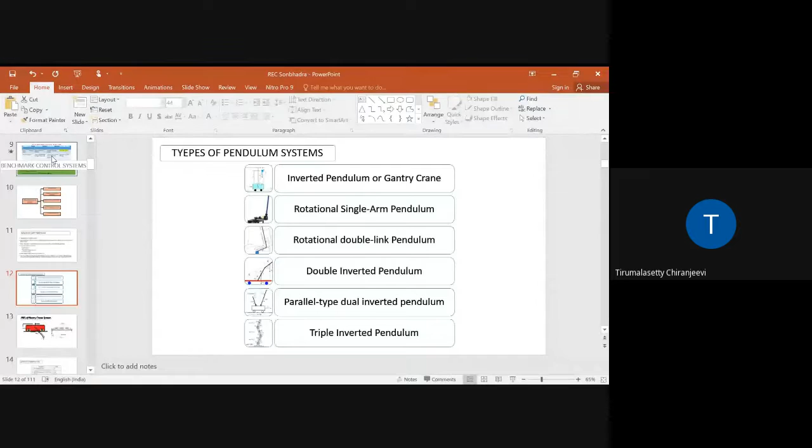Sorry for interrupting, sir, the slides are not moving. Yes sir, now moving, sir. Is it visible? Yes sir, visible, sir. Actually I am going on presenting mode. Can I go in presenting mode? Yes sir, presenting mode, sir, that's good.

There are 4 varieties of benchmark control systems. We segregated these 12 systems into different categories: process control category, servo control category, aero control category, and mechanical system control category. If you are designing a controller, you have to test it on these systems.

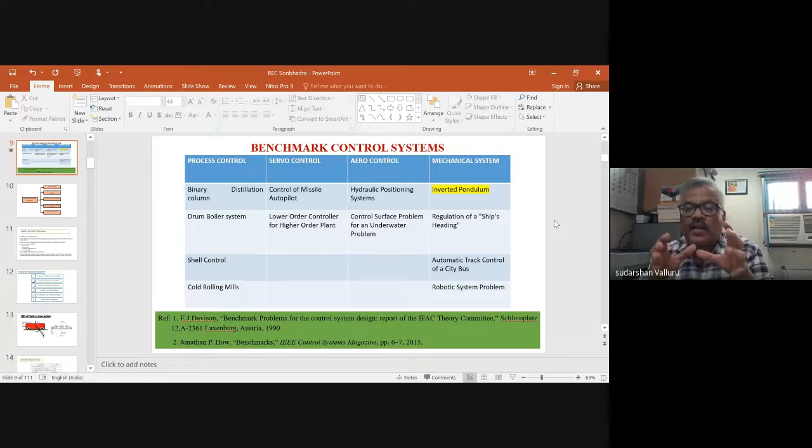Your controller is working, validated, and tested only on these systems, then its performance is considered good. Otherwise, we can't test a controller on simple transfer functions like 1 by s square plus 1, or s square minus 2s plus 1, or 1 by s square plus 2s plus 1. You have to test a controller on a dynamical system. These all come under dynamical systems.

For example, in process control, there is a binary distillation column, a drum boiler system. The mathematical modeling and equations for these are available in the Davison report, benchmark problems for control system design. I am not showing all these details here.

When you go for shell control, cold rolling mill, these all come under process control with higher order degree systems. The differential equations are of higher order degree containing non-linearities. Next, we come to the servo control head.

They have taken 2 systems: control of missile or autopilot mode of an aeroplane. The missile, after some time, will go on autopilot mode. When you are going to fire the missile, after that it will go on autopilot mode without requiring the pilot. At the time of firing, only the pilot is required. And you are traveling on the aeroplane.

You know very well, the role of the pilot, the role of human intervention, is when the pilot is landing the aeroplane, or when the aeroplane is taking off. At these 2 instants only, takeoff and landing, human intervention is required. Remaining things, there is no need of human intervention.

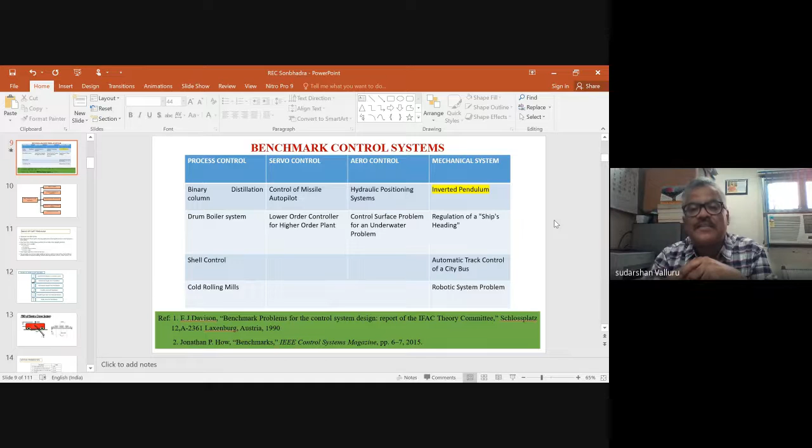The third category, aero control. Aero control includes hydraulic positioning system, control surface problem, and an underwater vehicle problem. This is what they classify as aero control.

Coming to mechanical systems: cart pendulum system is one category they design, and regulation of ship heading also comes under mechanical system control. Another one is automatic track control of the city bus. That system is also modern - intelligent transportation system, we are using track control of the city bus system in transportation. Now they are using automatic track control of city buses.

Robotic system problem. Robotic - you know very well - human robots are underactuated robots, only a single controller is there. Take for example our robotic arm - what is the degree of freedom of the robotic arm? 1, 2, 3, 4, 5, sometimes you see 1, 2, 3, 4, 5, 6. The maximum available degree of freedom is 6, like the human hand - the robotic arm works like this, to pick and choose, pick and place objects. We are going to pick something, we are going to place something.

That means the robotic system problem, the robotic arm, is also considered a mechanical system. But here only one controller is there - not one motor here, one motor here, one motor here. There are no 6 motors here, only a single motor, single actuator, single controller is there. This system is what we call an underactuated system.

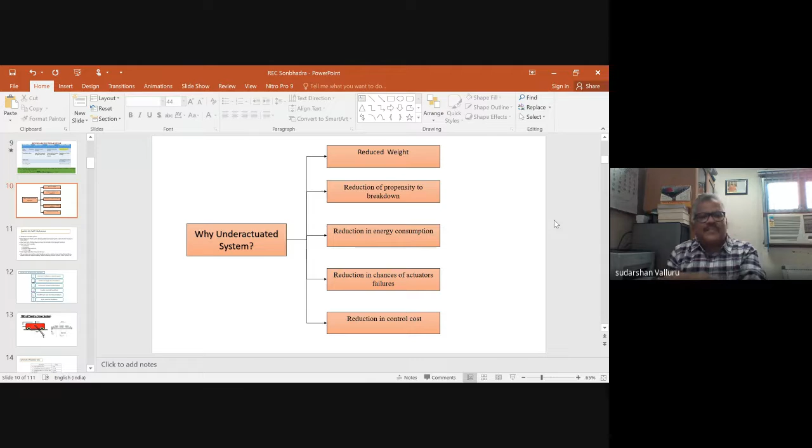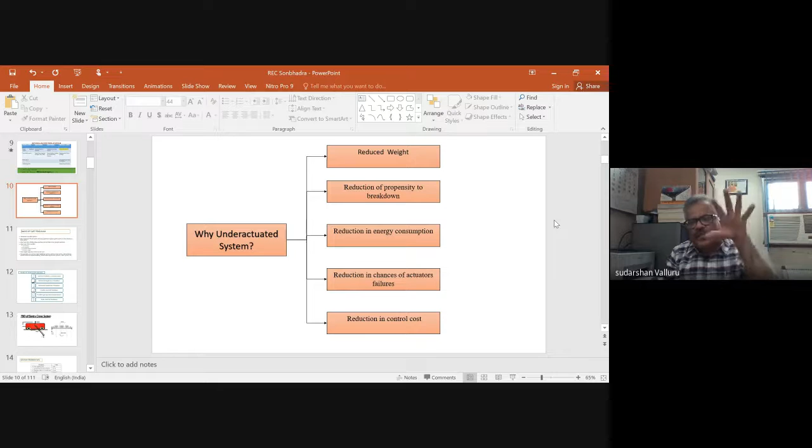Suppose if we are keeping 6 motors here for the robotic arm, 6 actuators for the movement. So suppose I am going to make a robotic arm now - 6 actuators are required, and for 6 actuators, 6 controllers are there. In these 6 controllers, there is a chance of actuator failure. If one actuator fails, it can't move further. And now, 6 controllers are required, so the cost of control is also very huge. That's why it's not possible - that's why we go for underactuated systems, because God has manufactured underactuated systems.

Underactuated - degree of freedom is lower, degree of freedom is lower. That's why, as I already told you, higher order plant with lower order control. The lower order control is lesser, but plant controlling capability is very higher. This is what we are going to say.

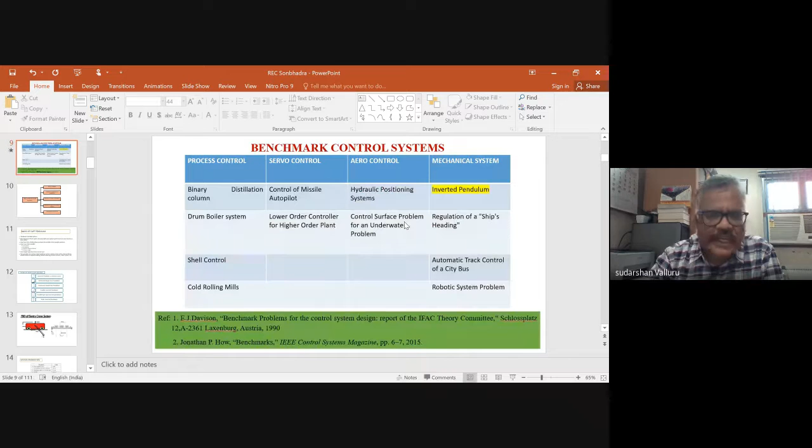Now in this regard, I am going to take my inverted pendulum as one of the systems we are going to test in our laboratories for different controllers we are going to design. Here I am going to take a cart pendulum system.

The cart pendulum system is an underactuated system. These are the basics of this cart pendulum system. It is a non-linear system, unstable system, and also a non-minimum phase system, because the system has right hand S-plane poles and zeros in close vicinity to each other. That's why we plot the poles and zeros. After plotting, we know it is a non-minimum phase system, meaning it has all right hand S-plane poles and zeros in close vicinity to each other.

Now the system has 2 states. One is a stable state, that is the down position, and the other is an unstable state, that is the up position. There is a cart, I will show you that. Two things are there: the down position is stable, but if the cart is moving, even the pendulum becomes unstable. There is no fixing part for the cart, and the pendulum is freely moving. Just a cart will be there, and we keep a pendulum on it. That means there are 2 states: the stable state and the unstable state.

Suppose, like we tried in our childhood, I don't know what you call it at home, we keep something vertical on our palm, some object, and try to walk with it. It automatically falls down from your palm. Have you observed this or not? Suppose you are keeping a broom, or what you call in Hindi - I think majority will know Hindi - jadu. If you keep jadu on your palm and try to walk, it will fall down. This is an unstable state, what I call an upright position. But if you just keep it touching like this, it is in a stable state.

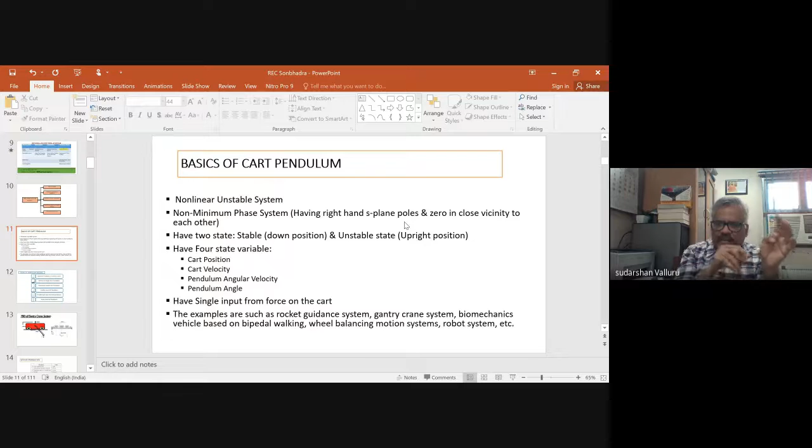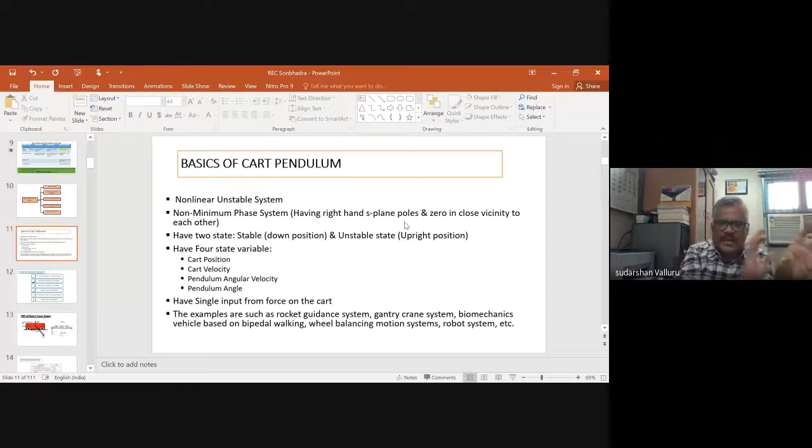That's why examples such as this basic cart pendulum system mimic the rocket guidance system, gantry crane system, and biomechanical vehicle systems based on bipedal walking. Nowadays, some bipedal two-wheel systems exist - we walk on biomechanic vehicles, bipedal walking, wheel balancing motion system robots. These robot walking systems also come under the category of the inverted pendulum system. That's why they are designed and standardized with a higher order degree, giving the 4 state variables in that report.

What I am going to say now is there are different varieties of pendulum systems available nowadays in the market. One is the inverted pendulum system.

Suppose the pendulum is up, this is upright position; pendulum is down, we call it a gantry crane. Types of pendulums: second one is a rotational single arm pendulum. Third one is a rotational double link pendulum, double inverted pendulum. A cart will be there, double and parallel type dual inverted pendulum, triple inverted pendulum, like that. Several varieties are available nowadays, standard systems.

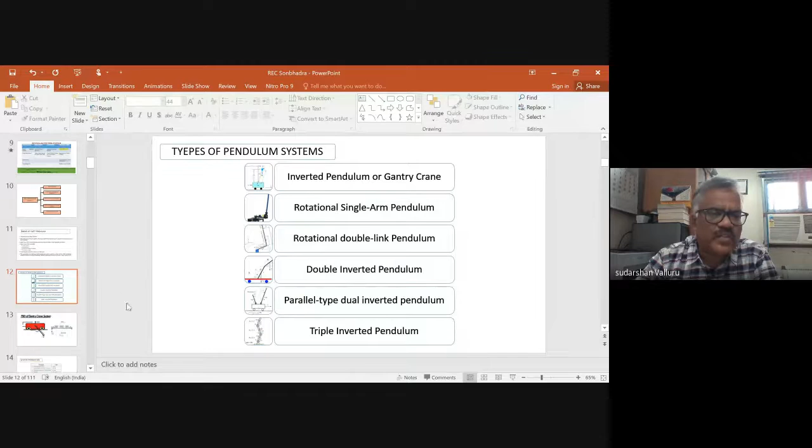Okay, you can see it. I don't want to go in that manner. What we are having, we will see from that only.

Ultimately, we are going to control the force supplied by this cart and pendulum from the DC servo motor. Ultimately, the DC servo motor I have to control by using a PID control. But the PID control has some problems.

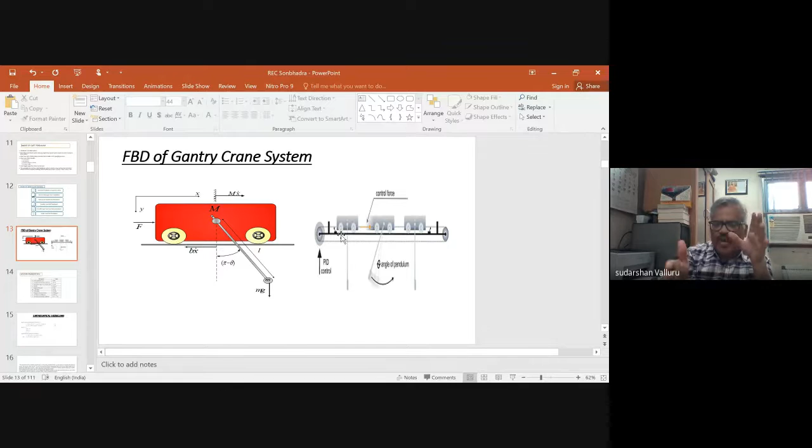Now, these are the system parameters. The force maximum available to the cart is plus or minus 24 newtons in that direction. The cart position from the reference, the middle one is the reference, is plus or minus 0.5 meter on each side, so the total length the cart will move is 1 meter. The pendulum angle with respect to the vertical axis is 0.1 radian, the gravitational force is 9.81 meter per second square, and the length of the pole is set at 0.38 meter. Here the flexibility is there to change the length of the pole, the mass of the pendulum, and the mass of the cart also.

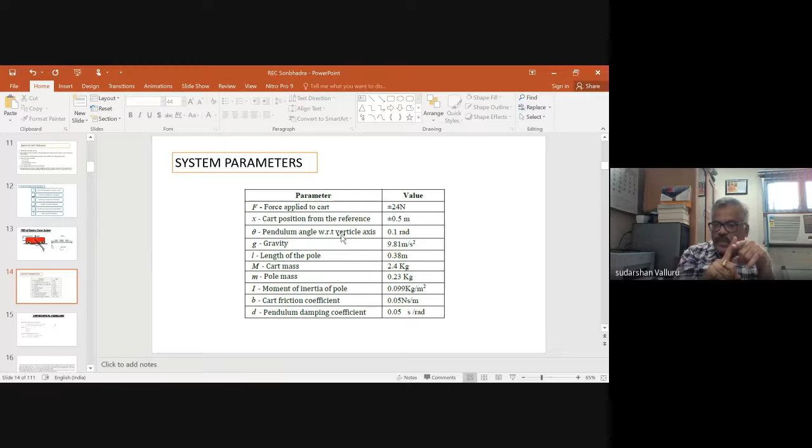That flexibility is in our hand. The cart mass M we take as 2.4 kg; you can't change the cart mass, but you can change the pole mass in our laboratory model. Pole mass, pendulum mass you can change. Pole mass given is 0.23 kg, and the moment of inertia of the pole is 0.099 kg meter square. The friction coefficient B is 0.05 Newton second per meter, and the pendulum damping coefficient is 0.05 seconds per radian. This is the system parameters what you are having, what you have taken.

Okay, this is the mathematical modeling equation, approximated equation. After that, by using the Lagrangian, we are making these equations.

Is it visible, sir? Hello? It is visible to me. Yes sir, visible sir, visible sir.

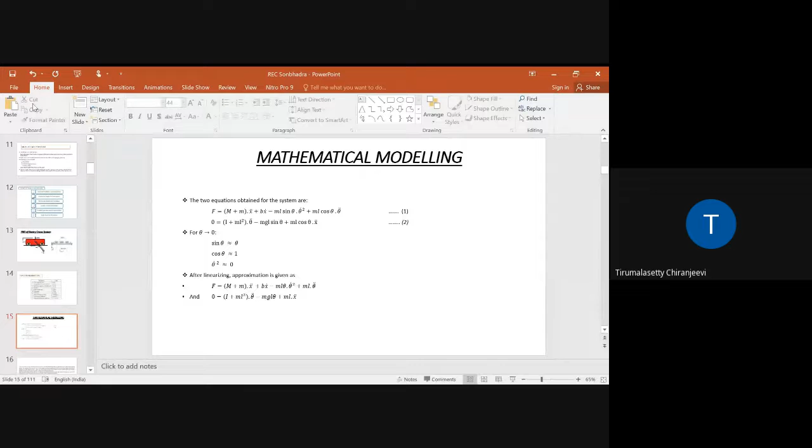These are the two equations we obtained for the system from the Lagrangian. Here we take theta equal to 0 downward, then approximate sin theta as theta and cos theta as 1, meaning theta dot squared (acceleration squared) is taken as 0.

After linearizing, these are the equations we get. Now, two forces act on the system: the control signal u(t) I am applying, as well as the gravitational force, to operate the system. The position of the cart at a particular instant is x(t), moving x distance with respect to time, as well as the pendulum angle theta(t).

This is the output variable for controlling 2 degrees of freedom, as shown in the free body diagram. Here, only x(t) could be directly controlled by an externally applied signal. Cart position is only directly controlled by the signal u(t), but theta(t) remains unactuated.

For the pendulum, there is no actuator, no motor for the pendulum. Ultimately, only a single motor is there. This is what I am going to show - here is the motor, only a single motor. For the pendulum, there is no motor; it is a free hanging pendulum that will freely move up and down.

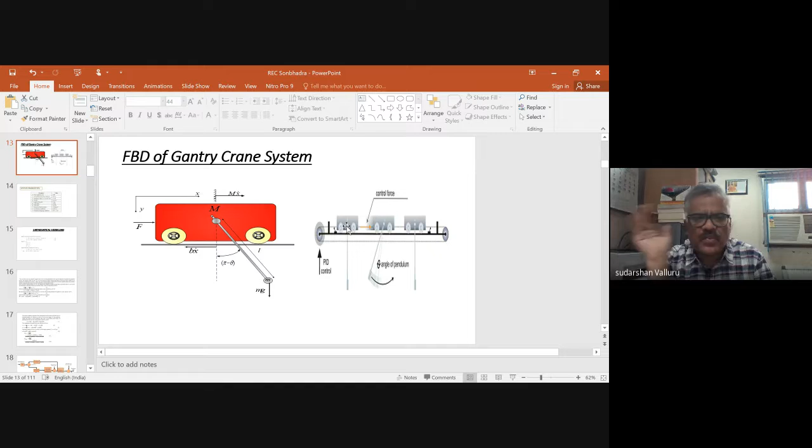That means force is given to the cart only. The cart position x(t) is directly controlled by an externally applied signal, which I call u(t), but theta(t) remains unactuated. This system could be considered an underactuated system, so I am going to call this system an underactuated system.

The corresponding movement of the pendulum mass in the x direction and y direction, I am taking as two components: one is L sin theta, and the other is L cos theta. These are the two directions we take.

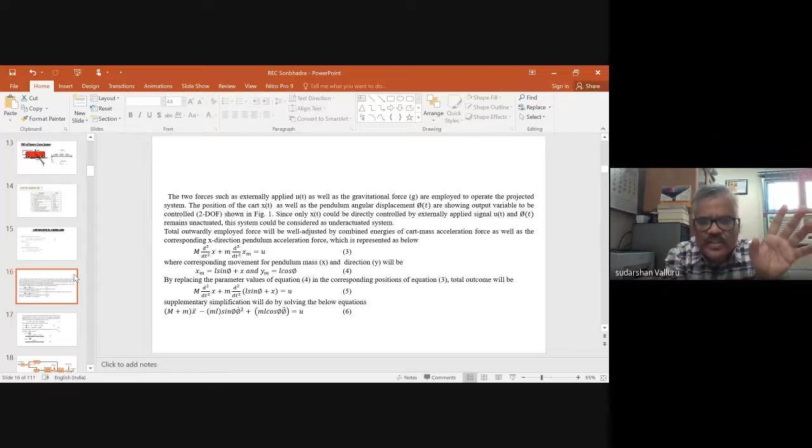Now my question is, how to control it? This is the cart and inverted pendulum system - this is what we are having, this is the system.

Here we give a position reference gain value and an angle reference gain value, there is a position error, and there is a controller - only one controller, a lower order controller for a higher order system. Then the position error and angle error are found from this. There is a cart-pulley servo mechanism system, and externally we can give disturbances.

I am creating external disturbances to the pendulum system, both on the cart and on the pendulum itself. This is the pendulum system we are going to take up.

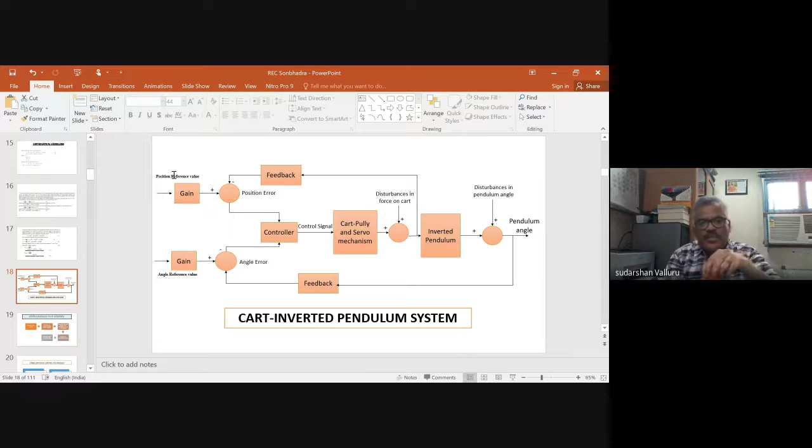Now we have to model it, but I don't want to go for simulation since that has already been done. We have benchmark models in our laboratory, where our people work on designing and testing different controllers. Now we are going in a different direction, modeling the controller within our chips, designing these active controllers within an amplification chip, and that electronic part we are also testing on our unmanned air vehicles. That research work is going on.

Now, modeling of the system involves analyzing the uncompensated system response. After that, we design the controller and test it in MATLAB. Our system is MATLAB based, so you make a mathematical controller in MATLAB rather than a hardware controller.

The system is in hardware, but the controller is mathematical through MATLAB. After that, tuning and verification of the controller performance takes place. Then we analyze the compensated system performance to see whether our controller works perfectly, and we validate it.

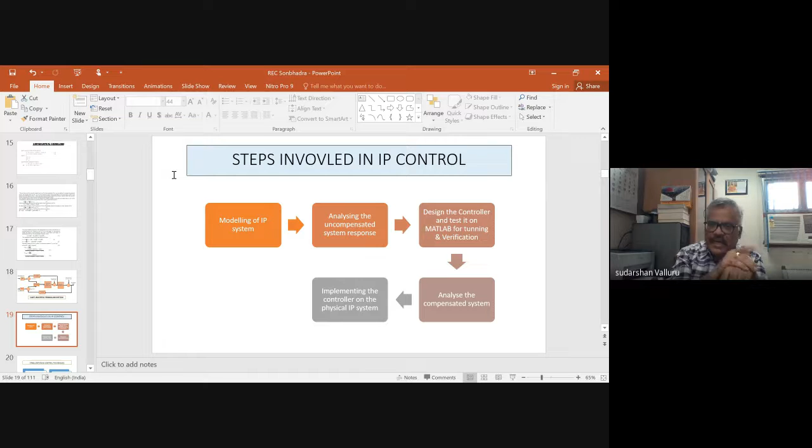After that, we implement the controller on the physical system. These are the general phases to test any controller on any type of system.

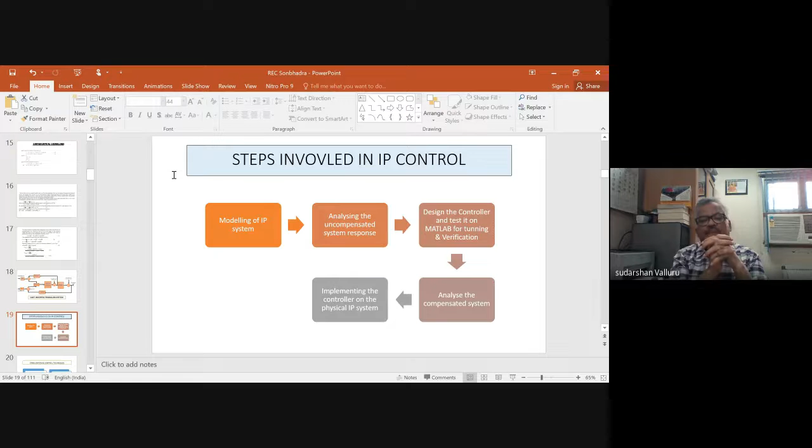Now there are two types of stabilizing approaches: sequential controlling and single step controlling. I will go for sequential control first. Sequential control has a swing up phase, stabilization of the cart, and switching control — these three phases are required.

In the swing up phase, the cart moves in a horizontal direction. When the cart is moving horizontally, the pendulum should remain up. This is like a rocket guidance system.

For example, at the Pakistan or Rajasthan border, you see rocket launching guidance systems mounted on a 4-wheel truck. The truck moves, and on it there is a guiding system, a rocket guidance pole that moves, always targeting wherever unidentified objects are coming. It is always watching.

Whenever an unidentified object appears, it automatically fires the rocket, the missile system. If that unidentified object enters Indian land without permission, this is the kind of thing observed at our Pakistan border.

A dedicated controller is required for both the up phase and the down phase, as well as the stabilizing phase. Once it goes up, we need to stabilize the controller to target an unidentified object, like an airplane entering Indian airspace — we want to fire at it. That is a moving object, just like your pendulum moving on the cart.

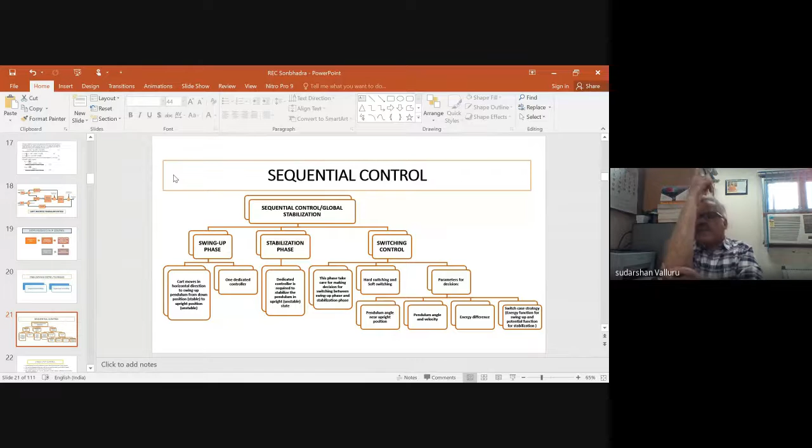After that, this pendulum will be stabilizing for a few seconds, then it will fire. This is a stabilizing phase. That's why a dedicated control is required to stabilize the pendulum in an upright or downright position. It is an unstable stage, moving like this, and I want to stabilize it.

Then another one, switching control. This switching control mainly has three things. This phase takes care of making the decision for switching between the swing-up phase and the stabilization phase. This is the switching phase. Either it will go up, and after going up there is movement in the pendulum, and I want to stabilize it, this phase.

After that, hard switching and soft switching, there are two varieties of switching. One is hard switching, the other is soft switching. And another one is the parameters for the decision. How to decide? The parameters for the decision are the pendulum angle near the upright position, at that instant I will switch to the stabilization phase. Pendulum angle and velocity, these two things I have to consider.

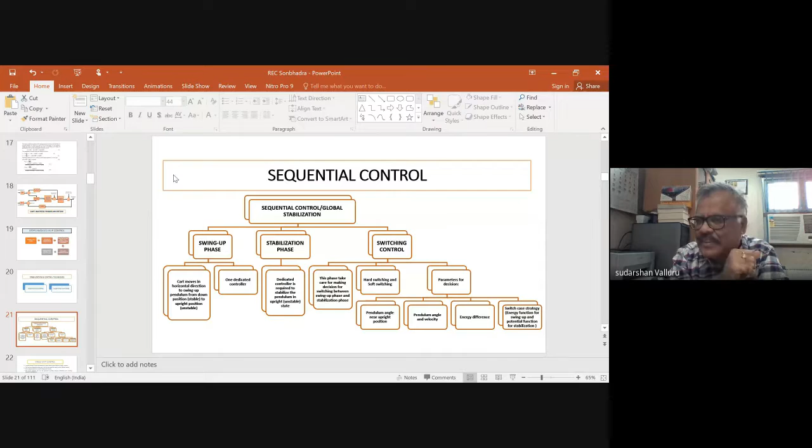What is the energy difference? What is the force difference that I am applying? After that, what am I going to do? Switch case strategy, that is, energy is a function for swing-up and potential function for the stabilization. Some energy is required to stabilize the pendulum up.

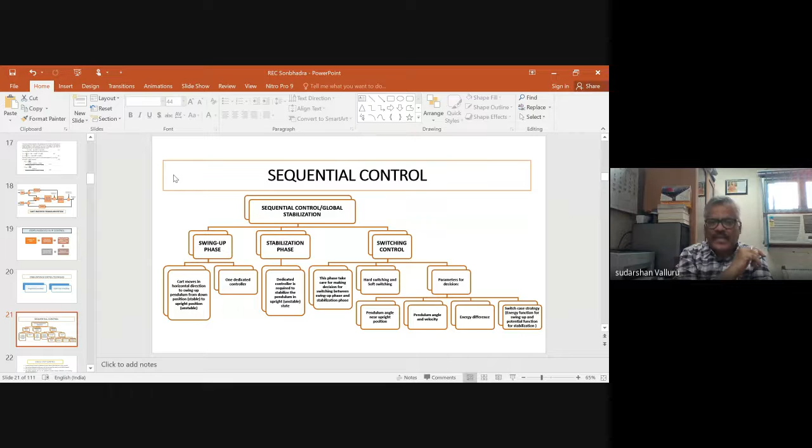Now, another one, as I already told, there is a single step control. Generally, for accurate control, we are doing this single step control only now. After this, we are required to go for the single step control. Accurate tuning of the controller parameters to ensure desired system behavior is required.

Here we are using, that's why, generally we are using a PID controller. PID controller is a common and good controller. It will work very perfectly as compared to other things.

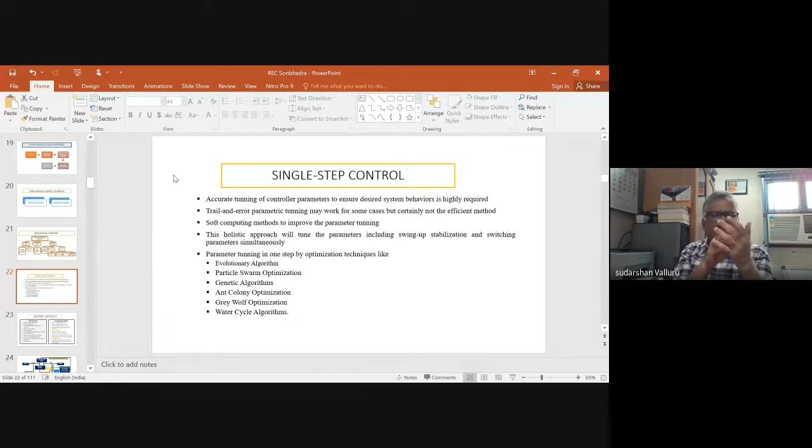Nowadays, what do you say? A few years back I went for training at Indian Institute of Space, ISRO, I went there. I asked, we want to design a controller. Nowadays we see neural controllers, fuzzy controllers, several controllers. I asked one scientist, why won't you use this instead of PID controller? Why won't you use this controller? I asked. For rocket launching also, they are using only PID control, controller is PID control only. They have not gone for these neural controllers, all these controllers, they have not gone. That's what one scientist told me.

What did he tell me? Suppose you are sending your son to space, you always take care of your son, he will come back exactly. That's why we won't use these controllers, I can't believe this controller. These neural controllers, fuzzy controllers, whether they will work or not, we don't know. But the PID controller is a simple and common controller, generally we are going to use it.

It is a three-term PID controller. It relates to the magnitude of the current error and the integral error, that is the history of the error. Three terms are there in this controller: it is related to the magnitude of the current error, the present error, and as well as the pre-history of the error, the history of the error we call integral.

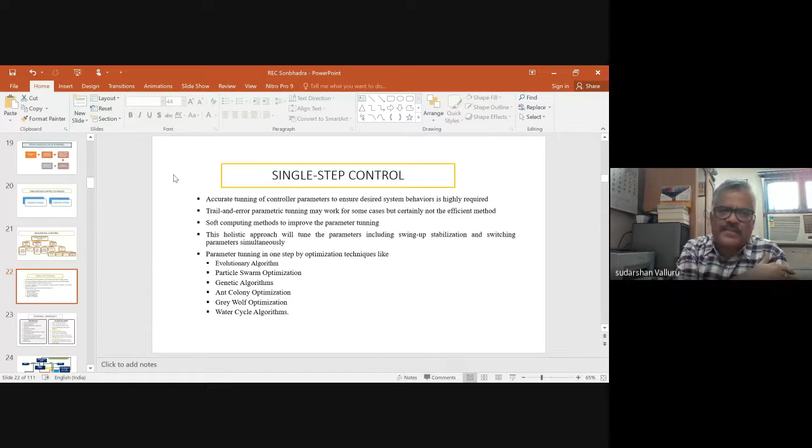There are three phases in life. In English also we study three things: present, future, and past. I remember my English teacher, he always said there are three tenses, present tense, past tense, future tense. Even then I couldn't understand it, now I can understand very well.

This is what there are three things will be there: the magnitude of the current error, that is the present; then history of the error, that is integral; and the third one is the current direction of the error.

That is what you are going to call the derivative term. Three terms are there: proportional, integral, and derivative. The proportional is the current error, the history of the error is the integral error, and the third one, what I am going to call the current direction of the error, that is the derivative.

Now that integral component is necessary to remove offset generally, but it can cause destabilization of a closed loop. While this may be countered by adding the derivative action, noise and abrupt set point changes may cause some problems. That's why commercial PID controllers usually add a small time constant to the derivative component to make it physically realizable, and often only differentiate the process output rather than the error.

But the problem with many industrial PID controllers is tuning. Many PID controllers are poorly tuned. Very poor tuning techniques are there, because the error values in a particular range will be there. According to the system, we are desiring the controller, we are desiring the force value. At a particular time it is changing, how to take the value according to the disturbance.

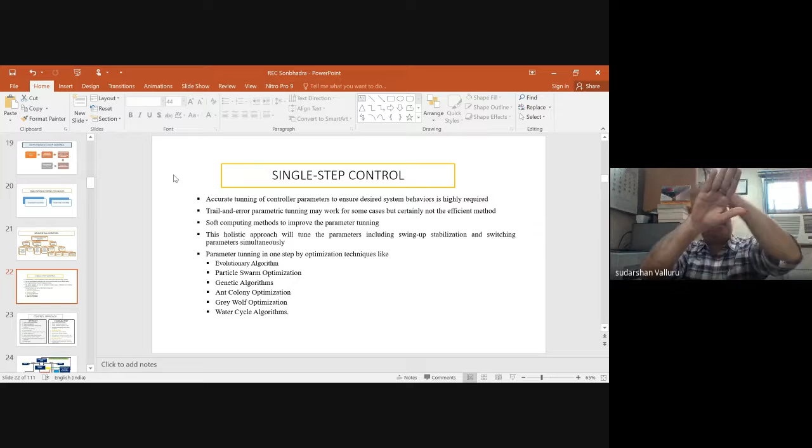External disturbance will be there. Suppose the aeroplane is flying, then atmospheric conditions change. Accordingly, the aeroplane is required to change its conditions. The force of the aeroplane has to change according to those external disturbances. But the problem is this PID in aeroplanes is also only PID control.

I am always saying there is nothing, only industrial PID controllers are in the aeroplane. That is to say, simply the pilot will take rest after takeoff. His duty will be there only during the landing. In autopilot mode, this PID controller will take care of the healthiness of the Boeing system. This is what I am going to say.

That's why it is poorly tuned. Tuning is a problem, tuning is uneconomical, it will take time to tune this controller. Tuning of the controllers can be difficult and also time-consuming. There is no correct fail-safe idiot-proof procedure for the tuning technique.

To know the values among these two things, there is no correct, fail-safe, idiot-proof procedure. I am going to say there is no idiot-proof procedure, no correct fail-safe idiot-proof procedure. This is what I am going to say, tuning is very difficult.

That's why a single experiment in a closed loop is the safest way to tune a critical loop. Although the calculations required are slightly more complicated than the traditional method, several traditional methods are available, and the design is for a process that approximates a first order system with time delay. The tuning parameters obtained by all these methods should only be used as starting estimates. That means the fine tuning of the parameters is best done by trial and error.

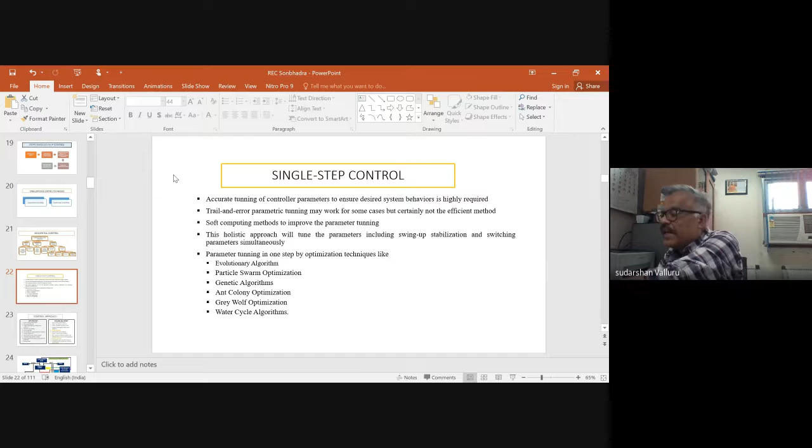These are all our bio-inspired algorithms. We use these algorithms to find the parameters of these three terms: current error, history of the error, and the current direction of the error, which is the derivative part. I have to know the present value according to the time of that controller.

Is it audible, sir? Only one way? Okay. Audible, sir, audible. I will go for the control approach.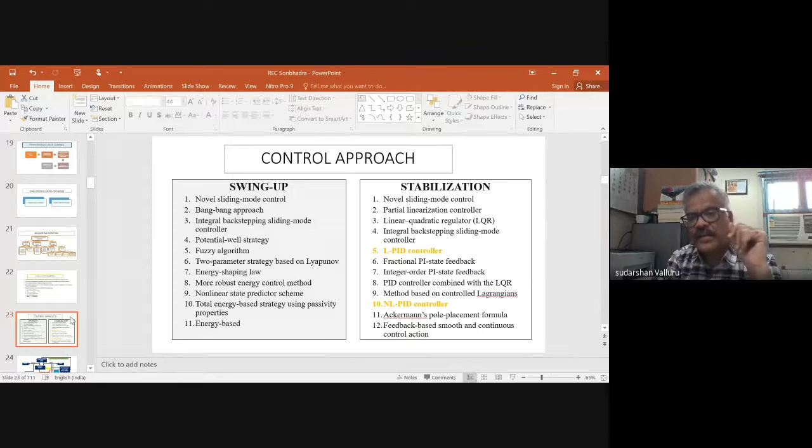Several methods are available for swing up or swing down control of the pendulum, direct control, indirect control. But for stabilization we are mainly going to use novel sliding mode control, partial linearization control. These are reported in the literature, and work is going on combining all these methods for stabilization of the system.

Here I am going to present two things. My topic is linear PID controller and non-linear PID controller. The controller can be linear, and the controller can be non-linear.

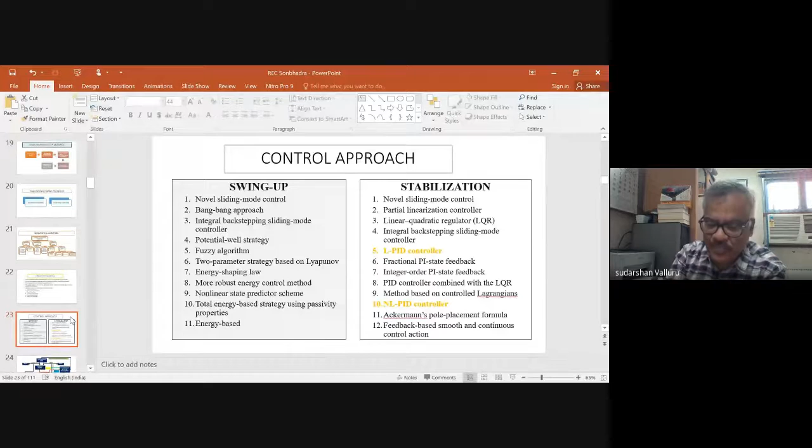What is the difference between linear and non-linear? We know very well, Y equals mx, that is linear. Y equals mx plus c. This c term itself gives the nonlinearity according to our mathematics. In my 8th class, I was unable to understand what y equals mx meant. I couldn't understand it.

Now I can understand. Now you see, this is the swing up or swing down model. This system uses the voltage from the swinging and stabilization control. We use voltage control of our DC servo motor, which gives some force, some torque, to the cart. The cart pendulum model is there.

There are two things: one is the position I am going to display, the angle I am going to display. The controller will go swing up or swing down, whatever it may be, but it should be stabilized. After that we use a controller here for stabilization or the swing up zone. There is also a select switch so the cart can't go in other directions.

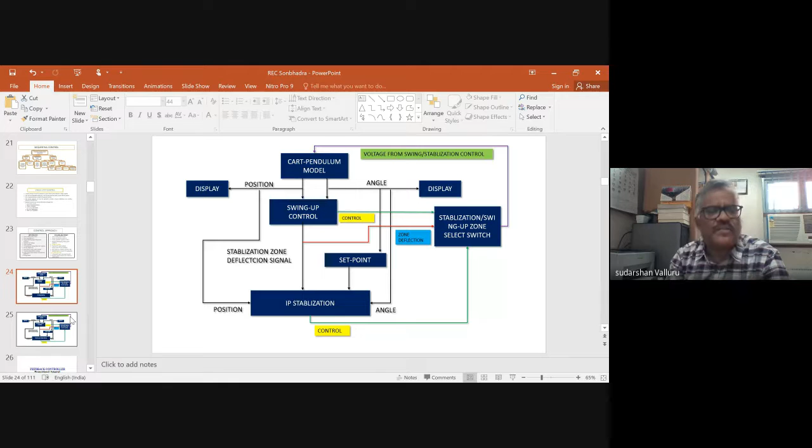The angle control will be there, there is a set point. After the stabilization phase, there is an angle controller, which I will represent with yellow color, and a position controller also there. When I go for swinging down, the gantry crane control, the cart pendulum model is the same but in a down position. Two controllers are used, one for the cart and one for the pendulum. It is a multi-loop control.

What I am going to say now is the feedback control. I already mentioned the PID controller, there are 3 terms always present. This is linear PID. E of t is the difference between the desired output and the real-time output, and the process follows the equation U of t equals... this is an equation everyone knows.

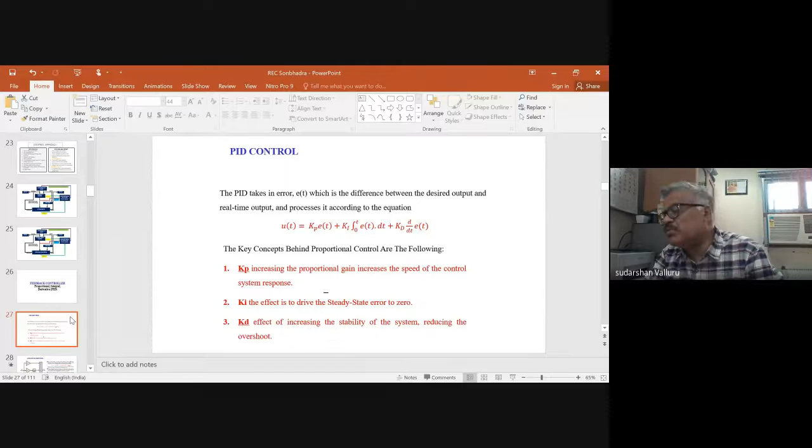Here the Kp, now I want to find this. The problem of tuning is to know the values of Kp, Ki, Kd. The Kp, increasing the proportional gain, increases the speed of the control system response. The integral term Ki has the effect of driving the steady state error to zero. Kd affects and increases the stability of the system.

It reduces the overshoot. The differential term represents the current direction of the error. The Kd term, the current direction of the error, increases the stability of the system while reducing the overshoot. It also reduces the overshoot.

Now this is what we are going to design in MATLAB. This is the controller, a linear PID controller, just a linear term. Here Kp, Ki, Kd are the three terms: proportional, integral and derivative gains.

I want to find the gains only from time to time. This uses the total control signal U of t. The proportional term leads to an increase in the speed of the system response, but this increase is only effective up to a certain limit, varying from system to system. A further increase will lead to oscillations of the variable being processed.

Now I will go further into non-linear PID controller. The linear PID controllers are widely used controllers for control systems due to the simple structure, efficacy, and easy tuning. Linear PID controller tuning is very easy. However, the linear PID controllers are insufficient for controlling systems which are non-linear, long time delaying systems.

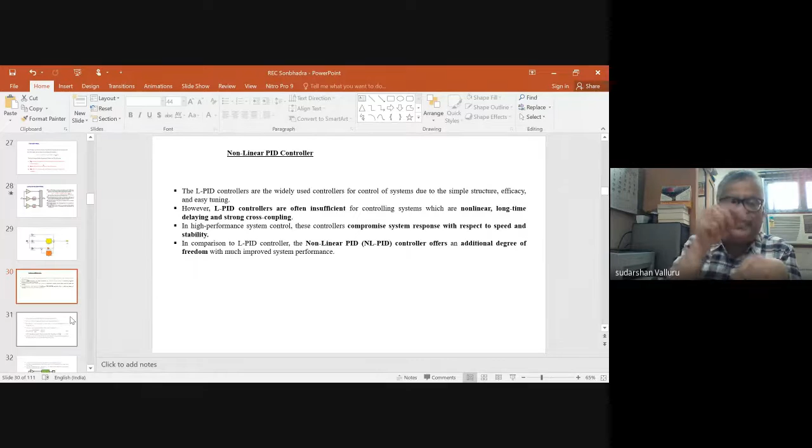And the delay will be there, long time delay for stabilizing up or stabilizing down. Also there is a strong cross coupling between the cart and pendulum. That's why in a high performance control system, these controllers are compromised with respect to system response speed and stability. Speed and stability of these linear PIDs are compromised.

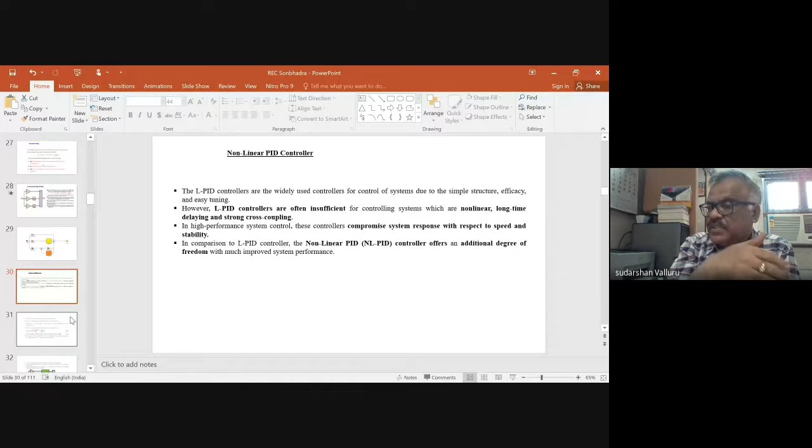But in comparison to the linear PID controller, the non-linear PID controller is proposed, and it will offer an additional degree of freedom with much improved system performance. This non-linear PID controller is the system structure we are going to take.

Here E is the error signal and delta describes the linear range. Delta describes the linear range, and here we are going to take the function f. The function f can accommodate a greater range of nonlinear characteristics, which is determined by alpha.

This is the mathematics behind this nonlinear PID controller. We are going to take a signal function. The control is u of t is equal to kp times the function of E, alpha and delta. Here the function of alpha, delta and E denotes the rate of error feedback to compensate for the nonlinearity of the system.

The value alpha is taken in the range of 0 to 1. This is the value you are going to take in, and the system needs to have a lower gain when the error is high and vice versa.

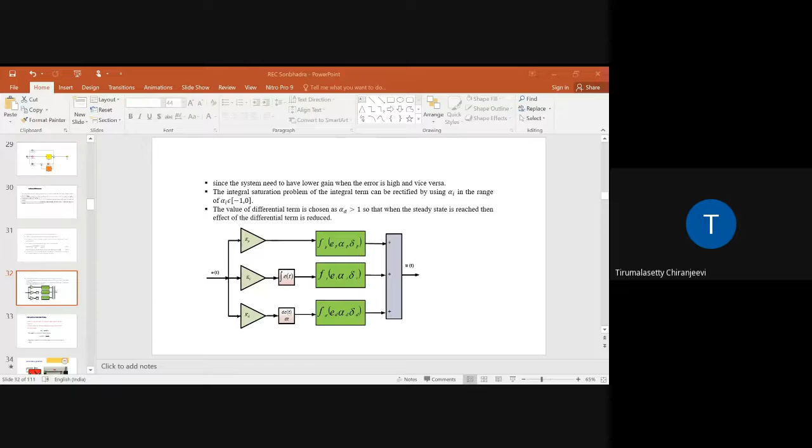We utilize this one, and also we use it to limit the output of the correction signal provided by the controller. It is meant to protect the cart from attaining very high velocities which may cause damage. Also, we are using a hyperbolic tangent function, in the range of -1 and 1, but he proposed 0 to 1. We changed that to -1 and 1. We used that one, but we succeeded in this.

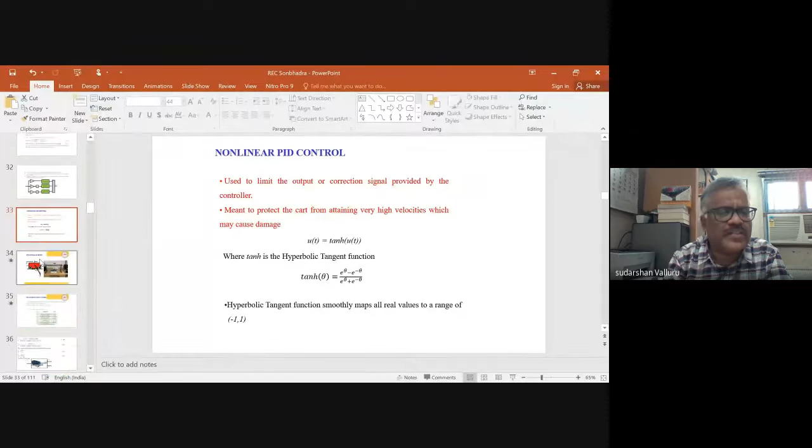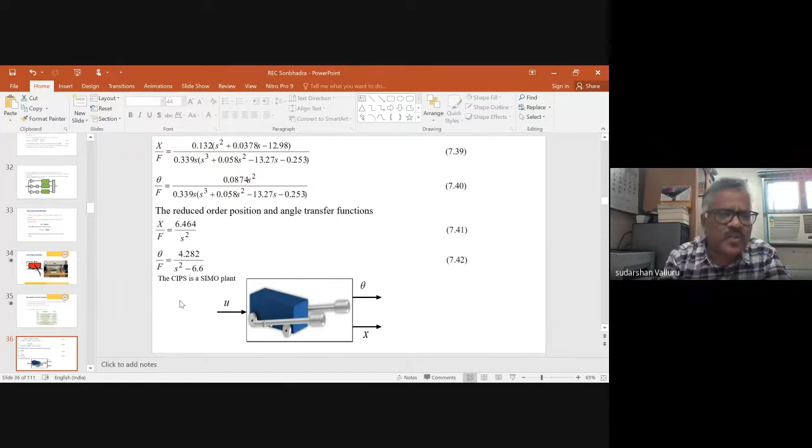This is a single input, multi output system. Input is single, output is multi, that is one cart position and a pendulum angle. This is what we are going to see, this is the theta I am referring to. Now it is in a SIMO configuration.

After that we derived this mathematical equation. But the problem is the multi-loop LPID and multi-loop NLPID design is somewhat difficult. Mathematically you can design it for effective minimization of the swing angle, either up or down. Up is very difficult compared to down, because it will have to go up, and it will take so much delay.

This is the cart inverted pendulum system with a 2-loop PID control strategy that we adapted. These 2 PIDs, C1 and C2, are what we adapted, and we take reference as 0,0. Voltage control only, we are going to take. These are the transfer functions, and this is the internal diagram of the PID controller we designed.

In this PID controller, within the D-part filter, there are 2 PIDs, one red color, one green color, that we show. Inside are the mathematical details, tuning, and the set of values, all implanted inside this one. I am not showing this one; I am not opening the MATLAB diagram here.

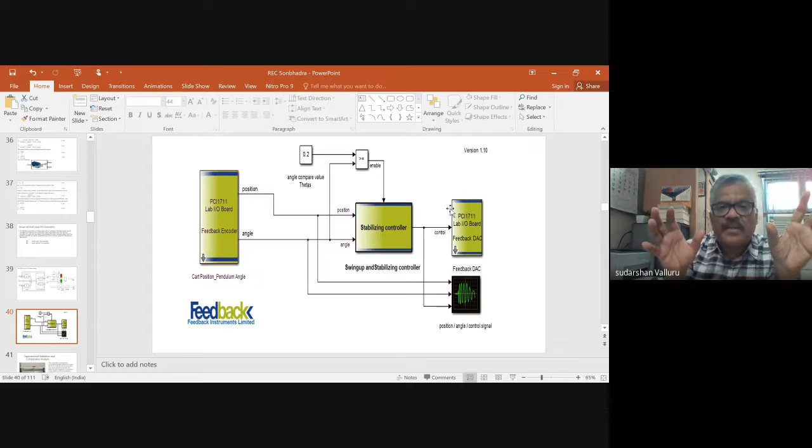This is the model of the stabilizing controller. There is a PCI lab board, an encoder, and 2 PCI cards. There is a feedback DAC, an encoder, and the stabilizing controller, and the system side. The hardware model of the system is connected with the data acquisition PCI 1711 PCI board. We use 2 PCI boards to connect with the cart position and the pendulum angle. The feedback DAC card is used to connect our designed mathematical controller with the real-time system. This is the diagram we are using.

Generally the controller maintains the voltage between plus or minus 24 volts DC to the servo motor in the real-time experiment. We have taken and purchased several benchmark systems, including feedback instruments' made digital control pendulum model.

The gain values for angle and cart control were tuned manually, using trial and error method for 100 seconds. After that, we tuned with different algorithms. Our students are working on tuning now. This is the trial and error method we used to tune.

We designed 2 PID controllers, one for the cart and one for the pendulum, and also an NLPID. These are the values of KP, KI, KD for the cart and the pendulum that we used, following the trial and error method.

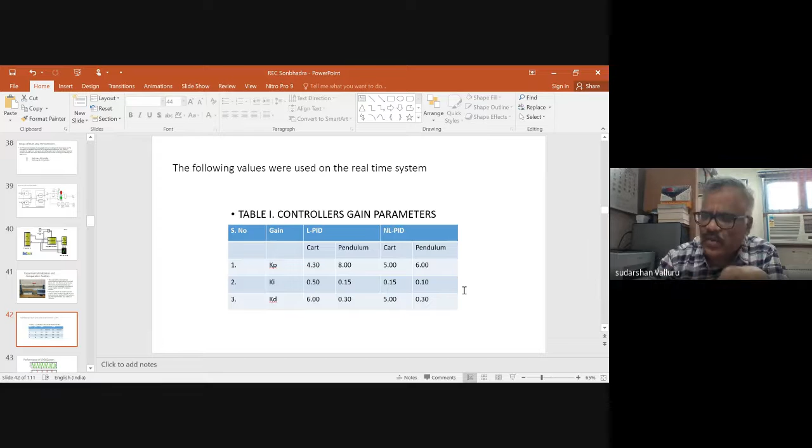You see sir, is it visible sir? Hello? Is it visible, audible? Hello? Yes sir, visible. Yes sir. Yes sir, okay sir. Visible sir.

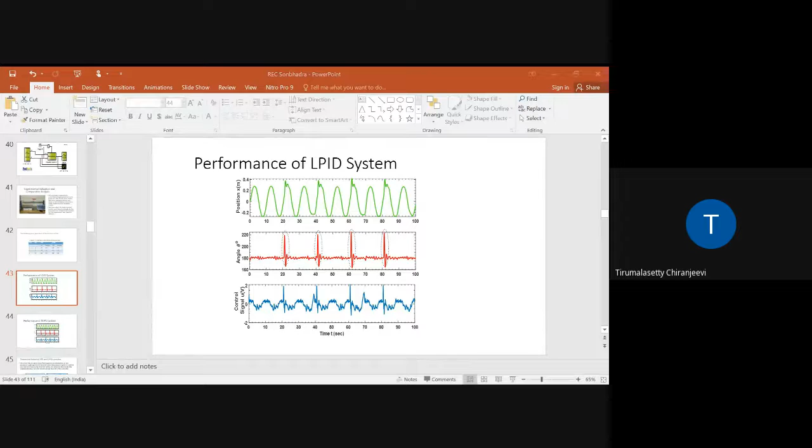The disturbance we gave was tested; we plotted the cart for 100 seconds, operated the system, and the angle also for 100 seconds, along with the control signal force. You see the disturbance given simultaneously, and at the disturbance side the control signal force value increases, the voltage is increasing. It is voltage control here. It takes a higher value to give sufficient torque to stabilize the system because we are giving external disturbances.

The same thing we find for the nonlinear PID controller, but comparing with the linear PID controller, the linear PID controller takes a lot more time to stabilize the system.

The nonlinear PID controller takes lesser time to stabilize the system. With the same magnitude of disturbance, the response is much smoother compared to the linear PID controller. Our peaks are very high with linear PID, going almost to 0.4, but with nonlinear PID it's just 0.2 above with the same magnitude of disturbance. That's why the nonlinear PID controller exactly controls better as compared to the linear PID controller.

This is the finding. You see, it will go here and become unstabilized. The cart is also unstabilizing at this instant. It is more unstabilized, and the distance is going to 0.4 meters.

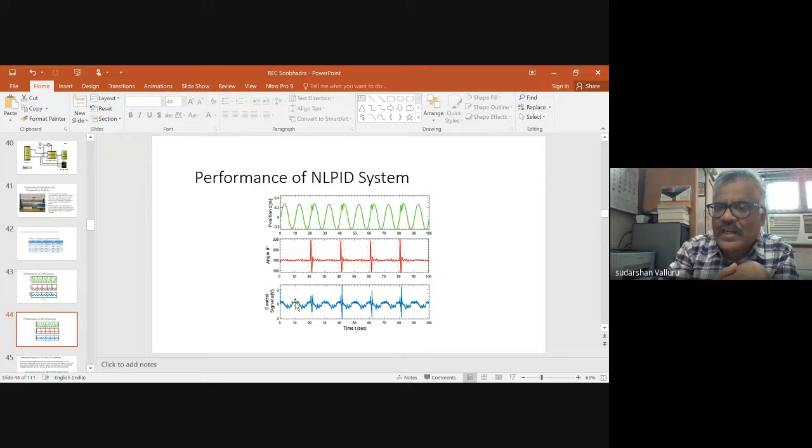Ultimately, the linear PID and nonlinear PID responses stabilize the pendulum angle against external disturbances. The linear PID controller takes 3.09 seconds, while for the same instant the nonlinear PID controller takes only 2.19 seconds to stabilize. Other values are 3.75 versus 2.26, 2.84 versus 2.23, and 3.28 versus 2.26. This is the time taken to stabilize the pendulum.

The multi-loop LPID and NLPID schemes are designed and validated on the benchmark Gantry-Crane system. It is observed that the multi-loop NLPID controller quickly brings the pendulum to the desired position under external disturbances, as compared to the multi-loop LPID controller. This is what we are finding.

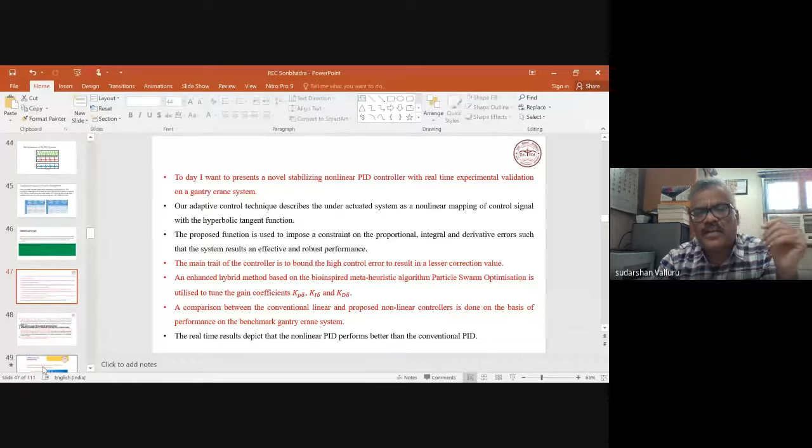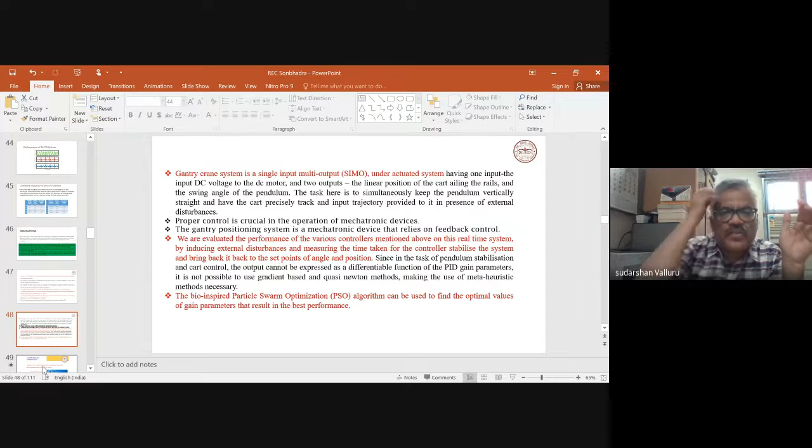Now I am moving to the novel stabilizing nonlinear PID controller with a tuning technique using bio-inspired algorithms. Here I am using it in a SIMO underactuated system.

Here we are going to evaluate on the Gantry-Crane. Using bio-inspired algorithms, for example standard PSO, we tested several PSO variants - fully informed PSO, adaptive PSO, and other algorithms to know the optimal values of the gain parameters Kp, Ki, Kd.

This is the particle swarm optimization standard algorithm. It is inspired from the natural behavior and dynamic movement and communication of insects, or the communication of birds and fish. Depending on that, the particle swarm optimization algorithm is designed.

Generally three things will be there. It is tending towards the center, and these insects move towards the center only. It will match a neighbor's velocity - one bird will match with the neighbor velocity on that side or this side. Accordingly, that velocity will be changed, and also collisions between the two birds are avoided. These are the things this algorithm depends upon.

We are going to find the global minimum by giving the communication and learning of different birds, taking a global minimum value here, whatever it may be. Instead of a d-dimensional vector, we are going to take a 3-dimensional vector because our gain parameters are 3 - Kp, Ki, Kd. We use this algorithm for that.

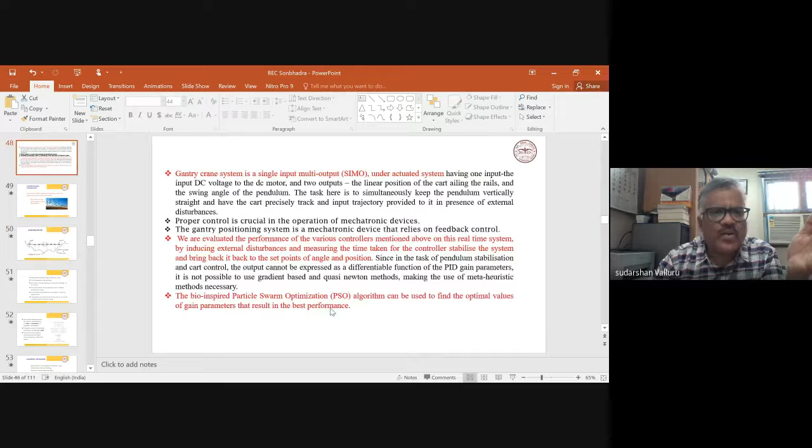Now we are using this one. This is ultimately going to give the best fit value of these gain parameters.

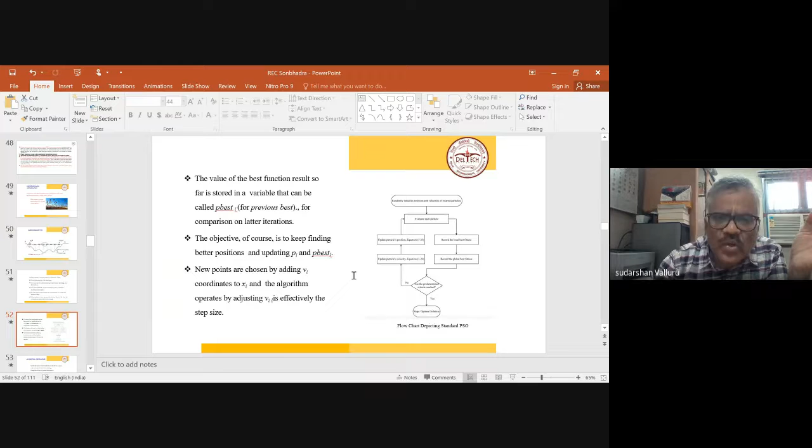What you are going to find: this is the pseudo code used for this standard PSO. Here you see two PID controllers - a nonlinear PID controller implemented, and a linear PID controller implemented with the derivative filter.

We tested our controllers on the real-time system. The first part of the work involved linearizing the model of the inverted cart-pendulum system, and the conventional PID controllers with random values were taken and tested, then optimized using the standard PSO.

Once the full construction of the control design was completed, we moved to the non-linear PID control, which is employed using the fully informed PSO. We also use this to determine these values.

Okay, this is our test setup. We are going to conduct an experiment. Ultimately, the following values we will find for the LPID and NLPID by using a standard PSO.

These are the values: one is for the cart PID, one is for the pendulum PID - C1 and C2. Cart is C1, pendulum is C2. These are the values we will find using the tuning technique with bio-inspired algorithms.

We are going to find these values by running offline, not online. It's not possible online because it takes a tedious amount of time. That's why we test the system offline.

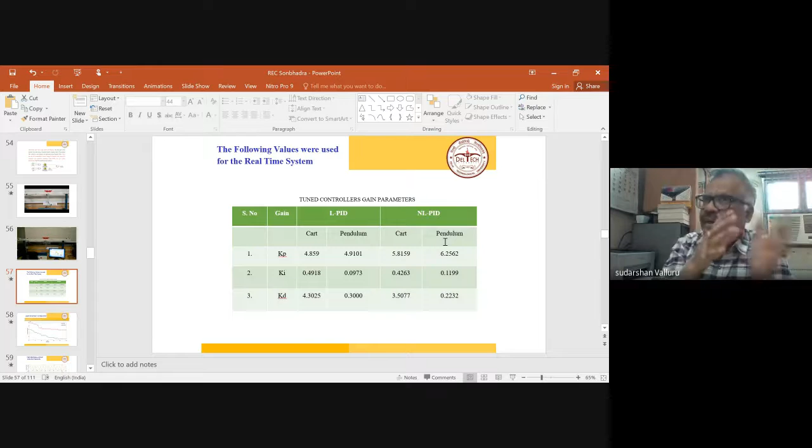By taking the parameters of the system, we find at different times what the optimal value is that we get. Like that, after substitution, we find these optimal gain parameters.

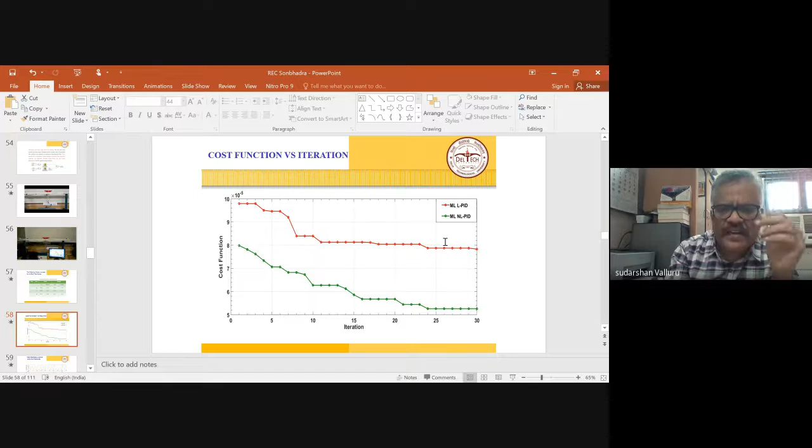This is the cost function you will see for the multi-loop LPID and multi-loop NLPID. This is the cost function. We iterated the PSO algorithm for 30 iterations.

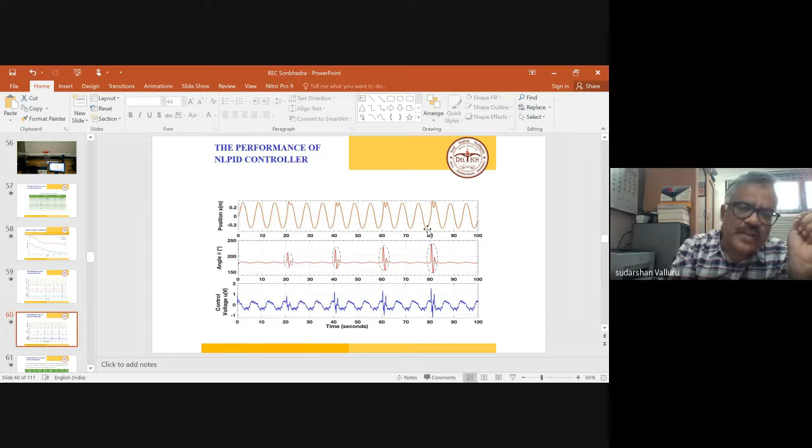This is what we found in our findings. You see this position, angle of the position of the cart, angle of the controller, and control voltage required - we are plotting these. That's why when you go for the comparative analysis, the time taken for these values matters.

Okay, that's why this is the FIPSO - this is the difference, the fully informed PSO we are using. For the fully informed PSO also, we are going to find the values.

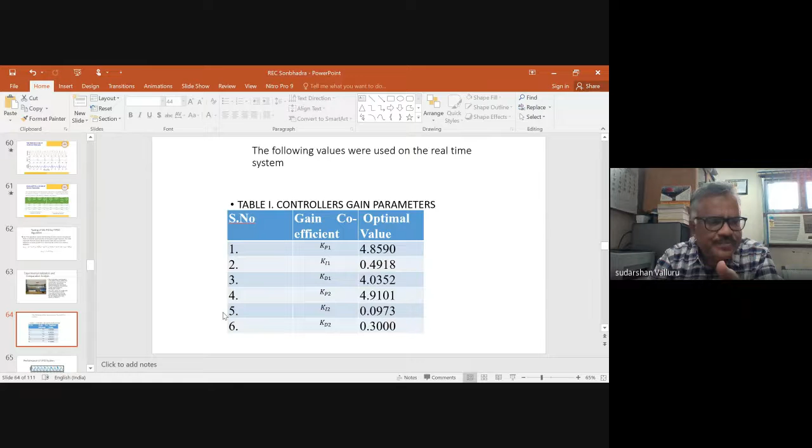Okay, these are the gain coefficients found by using fully informed PSO, and these are the performance of the LPID. Ultimately we are going to find amplitude of disturbance and time taken also.

The observation: multi-loop PID controllers were designed and optimal gain parameters obtained by using the fully informed variant of the PSO algorithm. We used fully informed PSO instead of the standard PSO. The controllers were validated to stabilize the benchmarked gantry crane system.

It is observed that the multi-loop LPID controller brings the pendulum to the desired position under perturbations in an average of 1.522 seconds.

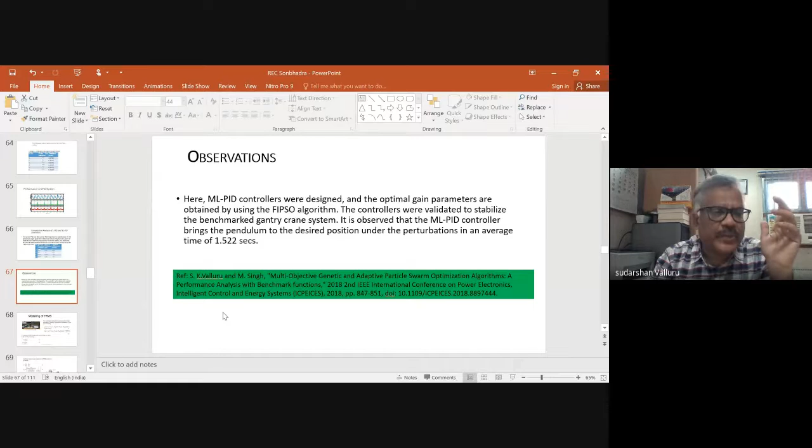Here we are using fractional order PIDs, integer order PIDs, different varieties of PIDs, to test stabilizing because the helicopter is in a vertical takeoff, vertical landing system, and is more unstabilized. As I always say, we never hear of airplane accidents, but we always hear of helicopter accidents.

When it will fall down, when it will go, we don't know, because helicopter is a more unstable system. For the helicopter, we use the same LPID, NLPID that we tested, and LQR also we tested.

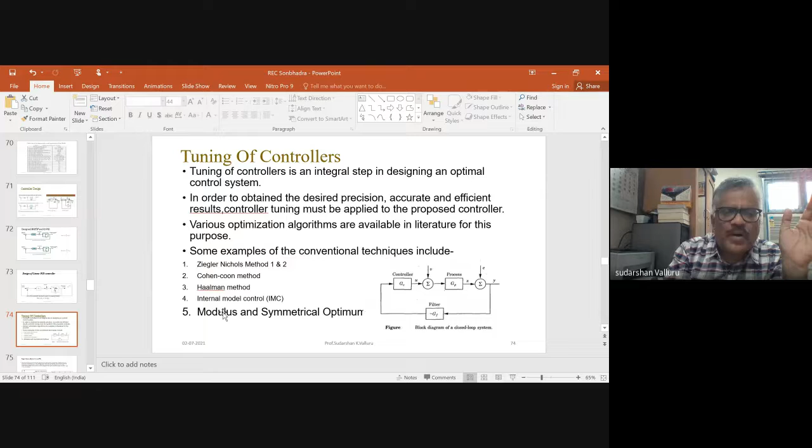For the tuning purpose we used Ziegler-Nichols method, Cohen-Coon method, Haalman method, internal model control method, and modulus and symmetrical optimum methods. We used some of these methods, whatever it may be.

But it is better to use genetic algorithm also for tuning and finding these parameters. This is some pseudocode for the genetic algorithm. Here I am using a multi-objective genetic algorithm, because a simple genetic algorithm did not work on our controllers to tune them.

Why? Because the order of the degree of the system is very high. That's why we went for the multi-objective genetic algorithm.

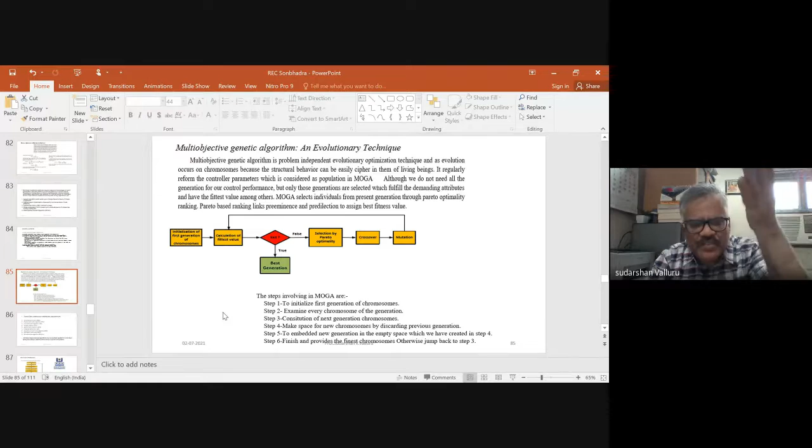This is the multi-objective evolutionary technique, how we used it best. This is a flow chart giving steps for using this multi-objective algorithm to find the KP, KI, KD values.

Nowadays, we are working mainly on meta-heuristic algorithms applied for different systems: Gray Wolf optimization, cuckoo optimization, lion optimization, ant lion optimizer, spotted hyena optimizer, dragonfly optimizer, grasshopper optimization algorithm, moth flame optimization, bat optimization algorithm.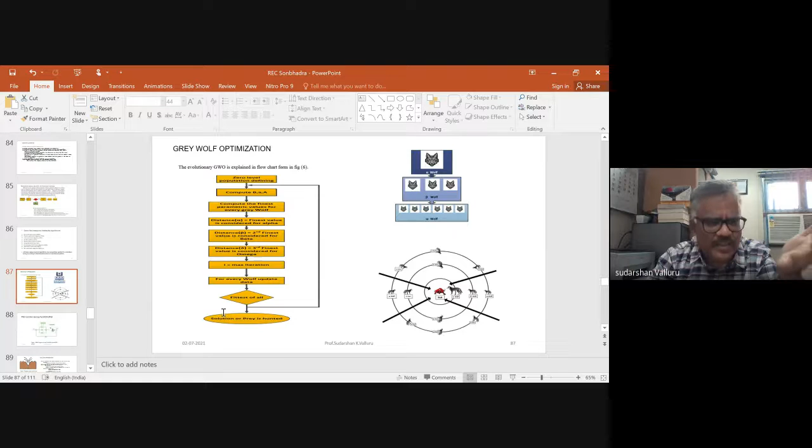These are naturally inspired algorithms we apply mainly for controllers according to the desired performance of the dynamical systems. This is the Grey Wolf optimization, which is available, and I use some of these algorithms for tuning the PID controller parameters.

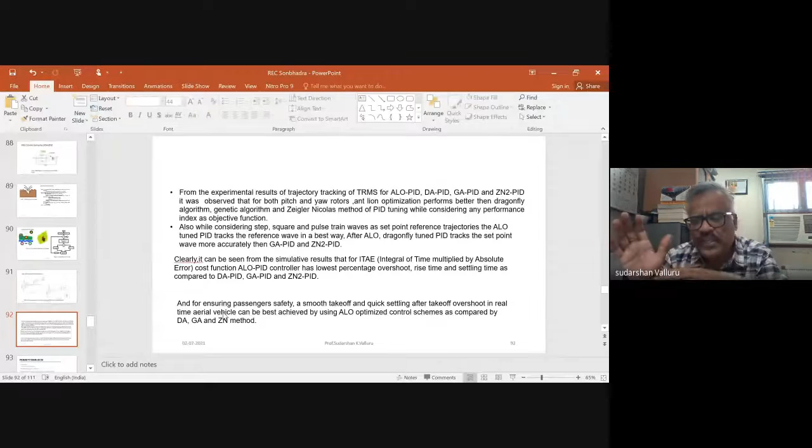We also used ant lion and dragonfly algorithms, and we find results on simulation systems only, where we simulate and find the errors. Ultimately we are using bio-inspired algorithms to tune the industrial PID controllers.

Here we make a lookup table. From that, it automatically takes the external disturbance - however much disturbance comes, it automatically takes it and immediately stabilizes the system. This is the procedure we follow.

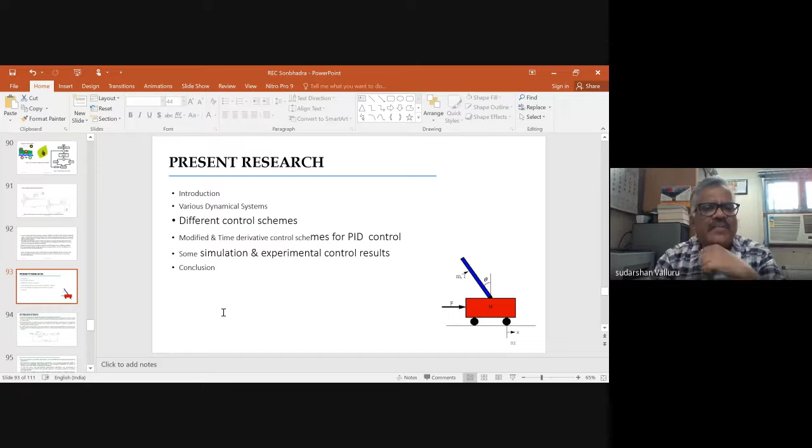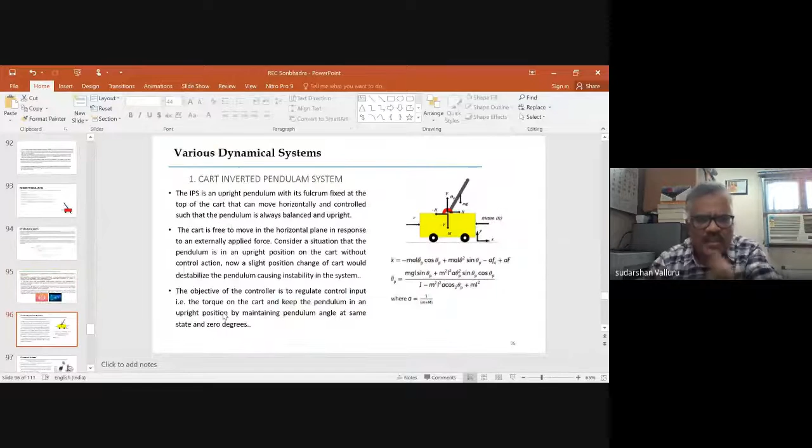Presently we are doing research, mainly our students are researching different control systems, going through different tuning techniques, mainly on the inverted pendulum system, gantry crane system, and also the twin rotor MIMO system testing different controllers.

Not only that, we also have a ball and beam system in our laboratory, testing the ball and beam positions as an unstabilized system, and we also have a robotic arm. Recently we are going for an underwater vehicle - we are procuring it, and we have already simulated the underwater vehicle system, which is also available.

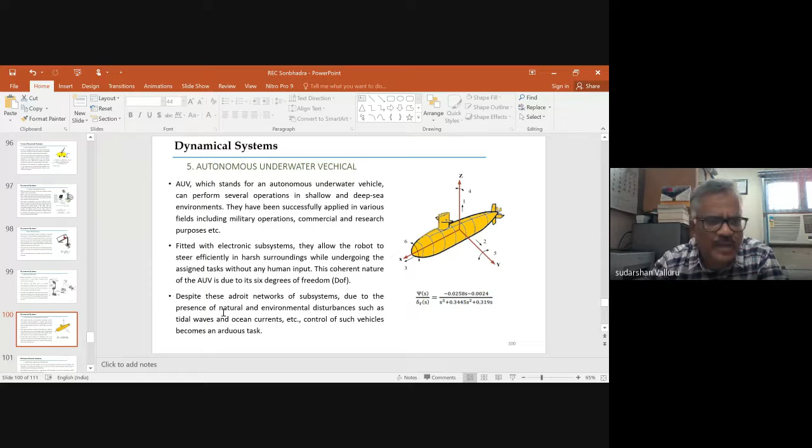Recently, we published one paper in one conference on the simulation of underwater vehicle, but with different control schemes. We are using, nowadays, the fractional order PID controller, as well as different control schemes.

I to the power of lambda, D to the power of mu, fractional order PID controllers also we have designed. The work presently going on, and modified PID control schemes also we are going to utilize.

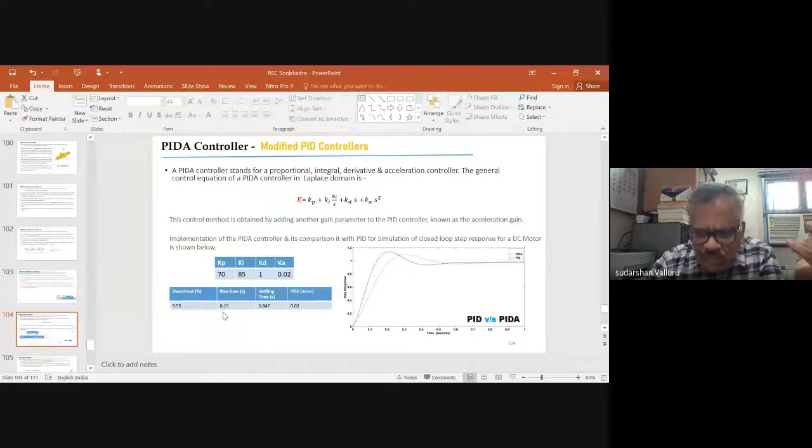Mainly some modifications what we are going to do, that is acceleration modified PID and acceleration controller, PIDA. We are going to test it. We have already mathematically designed it. We have to test it on our different systems.

Another one, the PID controller's asymptotic stability is usually smaller than the traditional PD controller. This modified PID controller has several modifications. Formalsky proposed a modified PID controller, that is PI sigma D.

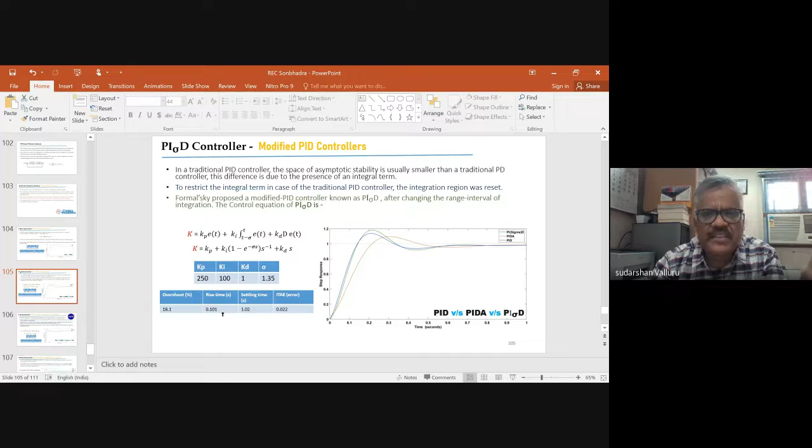After changing the range of the interval integration, we are using these controllers also. We are using nowadays, and I think generally TID controller, NASA using TID controller. TID controllers are developed by NASA. TID controller is an upgraded version of the conventional PID controller, what NASA is using. We have already designed some TID controllers also.

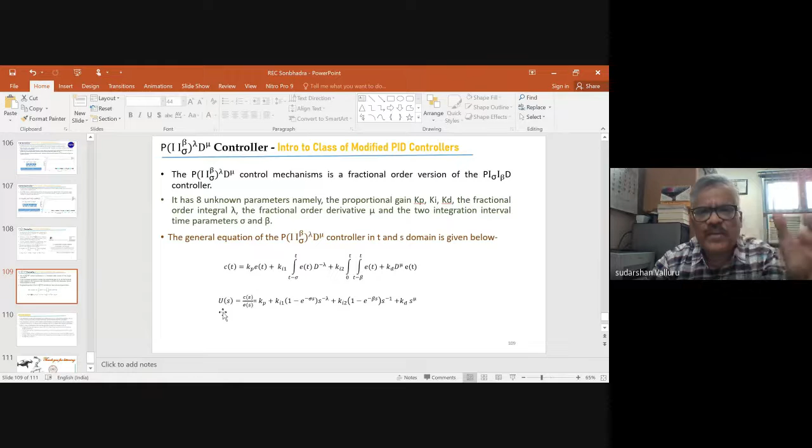In the S domain, same transfer function, we are going to use it. We have already simulated it. Fractional order PIDs also we have used. Another one, different varieties of modifications we are going to use according to our requirement. Several modified PID controllers we are using, with some modification according to the system. This is ultimately what I am going to say to you.

One minute, sir. I want to show one video, whether you believe I should show you. I think I have not shown the video, how it will be stabilizing.

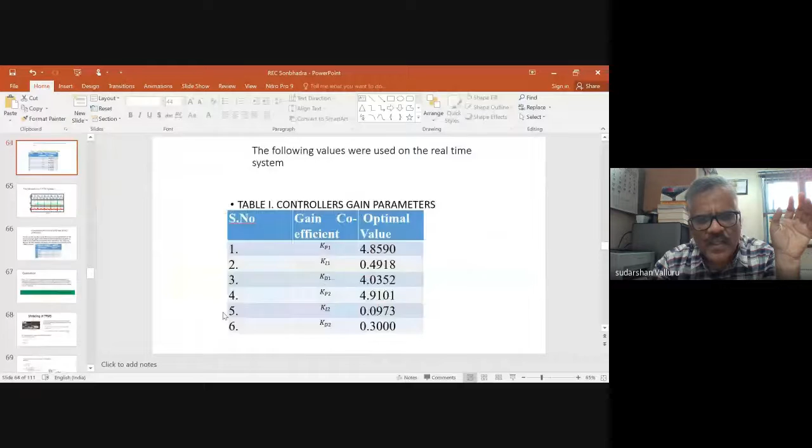Will go in presentation mode, then only I can show it. Is it visible, sir? Video is playing or not? No, sir, not playing. Slides are moving, sir. You see the video, no sir? I'm playing the video, is it visible sir? Sir, video is not playing, sir. Some image is showing, sir. Oh, I am playing, it is showing to me. It is playing.

Can I play, sir? Is it visible? Is it visible, sir? Yes, sir. Maybe now some noise is coming, sir. Sir, only image is showing, sir. Video is not coming, can I give disturbance? Image is showing, yes sir. Yes sir, I am on my laptop, it is showing the video. In my laptop it is showing video playing, sir. Yes sir, yes sir, so some noise also coming, sir, from your laptop side. But here only image is showing, sir. Is it like that? Yes, sir. What to do?

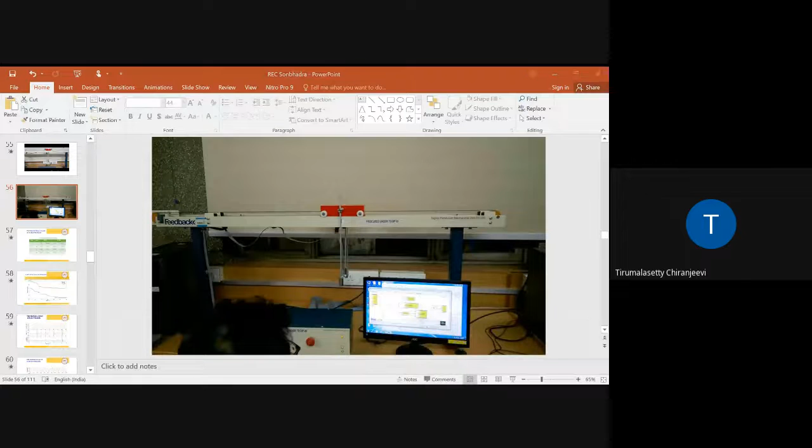I think to avoid mirroring, don't share your entire screen or browser window. Is it? It's not visible, sir. No sir, you may, yes yes sir. Now sir, now you can play, sir. Now can play, yes sir. Yes sir, yes sir, yes. Now it is visible, sir. Playing, sir, playing.

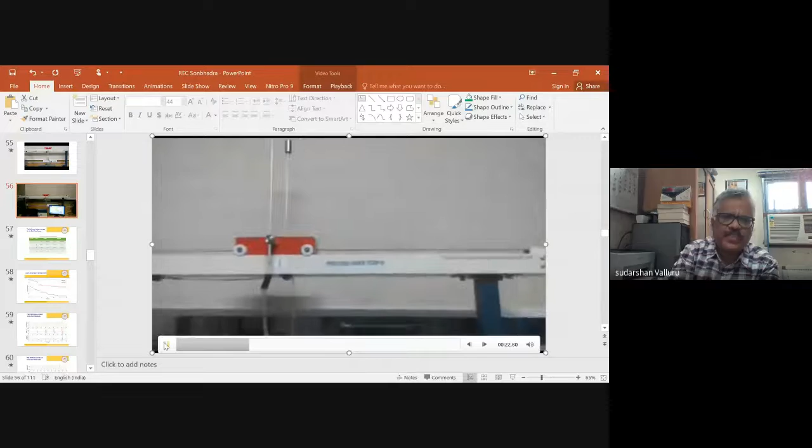It is swing up, sir. Yes, sir, yes, sir. Will give simultaneous some disturbances. Even though we are giving the disturbance, it will swing up only.

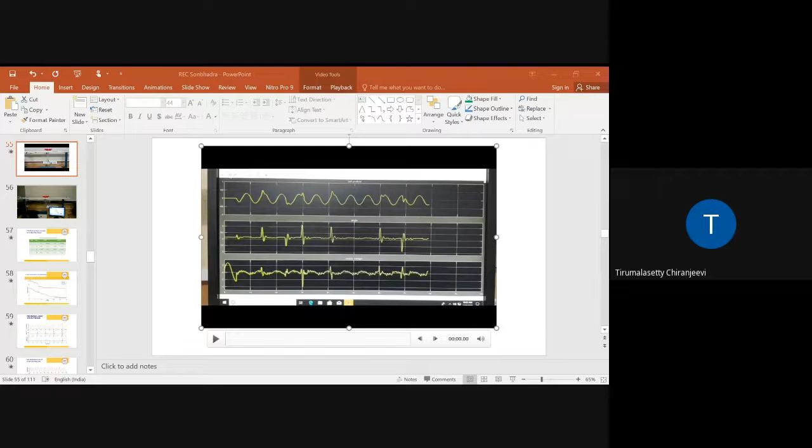Sir, thank you, sir. Thank you very much, sir. Thank you very much, actually I know you are very busy at this time, but then also you have given the lecture, sir, thank you, sir. Thank you very much, sir. Thank you very much, Chiranjeevi, Dr. Chiranjeevi, for giving me the opportunity to deliver today's lecture. Thank you, sir, may it's my God's pleasure, bless. Sir, thank you, thank you sir. Thank you sir, can I leave now? Yes sir, yes sir, okay.